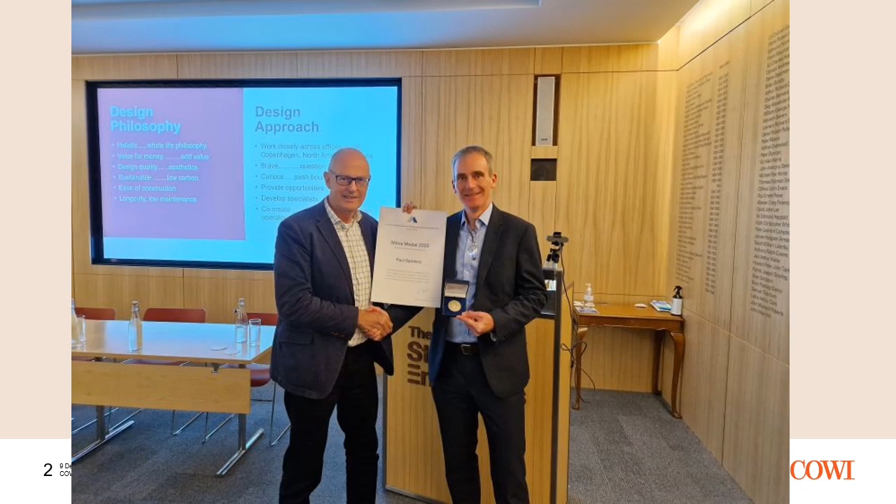I joined what was Flint and Neill, and has now become part of COWI in the UK, a little over 20 years ago. At that time, it was a partnership run by Ian Firth and David Mackenzie. It's now part of a much bigger organisation. But I think the philosophy that Ian and David brought to the organisation and brought through into COWI still remains very firm.

And indeed, preparing for this lecture was a very good opportunity for me to condense my thoughts in this regard. I think we try to bring a holistic, whole life approach to all of our projects. We like to add value, and that's not just monetary value, that's adding value in lots of different regards.

Design quality has always been at the forefront of what we do, and that's a philosophy that's very much been promoted by Ian Firth, and I think is best summarised by his Institution of Structural Engineers presidential address just a few years ago. We work with architects on a great number of our projects, and I think that again is an extremely important way of adding value.

That collaboration is really key to what we do. Sustainability has always been at the heart of what we do. I think the last few years have seen that condensed into a real focus around embodied carbon, but I think that again rings very true to what we do.

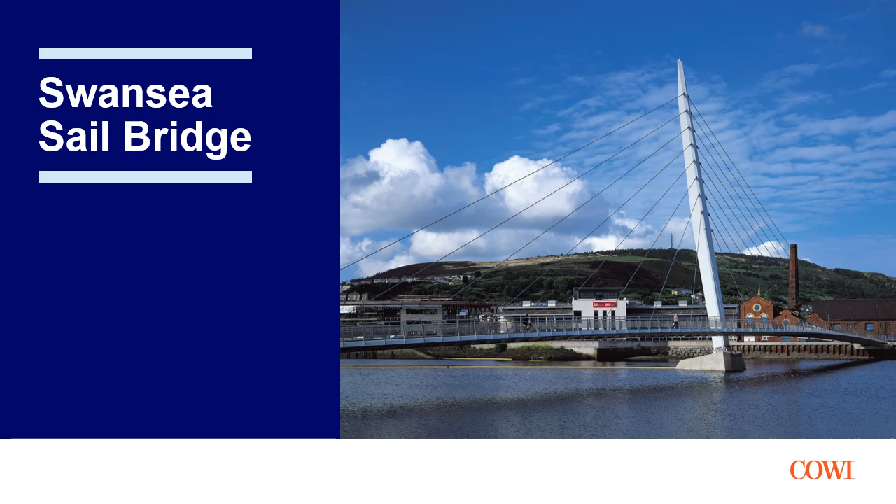So this was my first experience of working closely with architects and really starting to appreciate the value that they bring to projects such as this. I was very fortunate to work with Jim Eyre, who heads up Wilkinson Eyre, together with Martin Knight and Ben Addy, who I've gone on to work with on many other projects through the years.

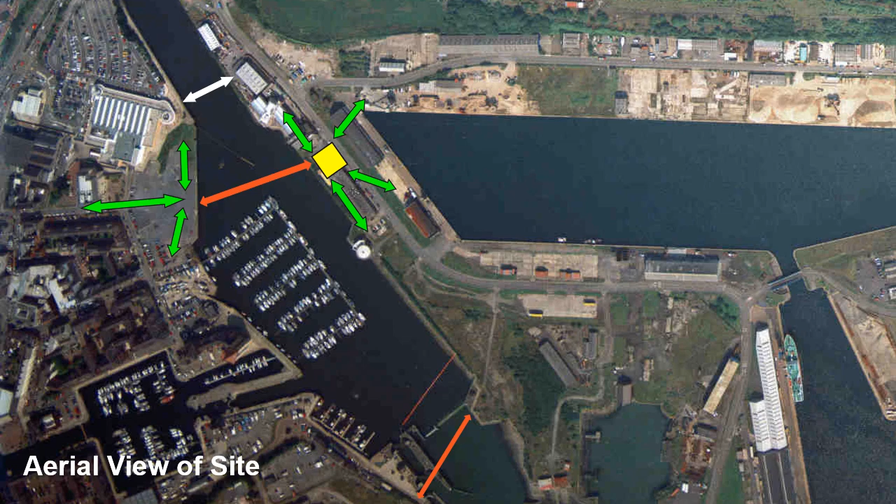This is the design that was developed for the Sail Bridge, very closely developed by Wilkinson Eyre and ourselves. The cable stayed bridge itself consists of a 42-metre high steel mast which is leaning backwards, with a gently curving deck supported off one side by a series of cable stays. Structurally, it's quite a unique configuration, I believe.

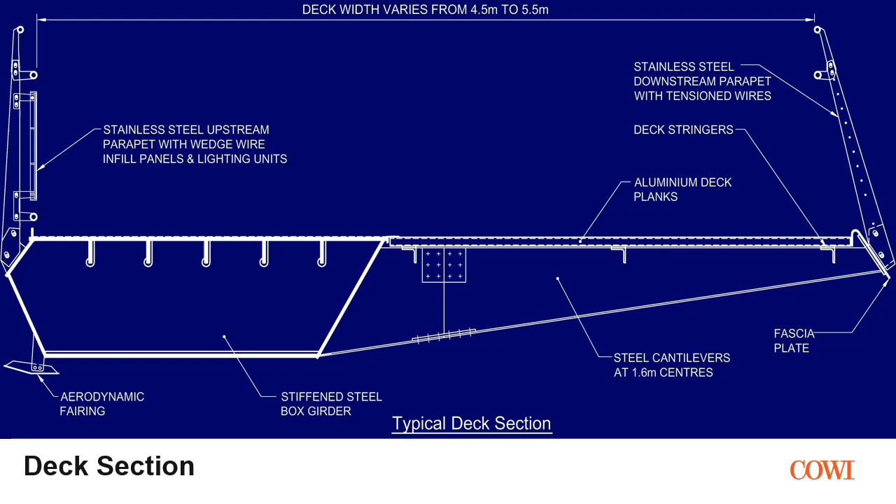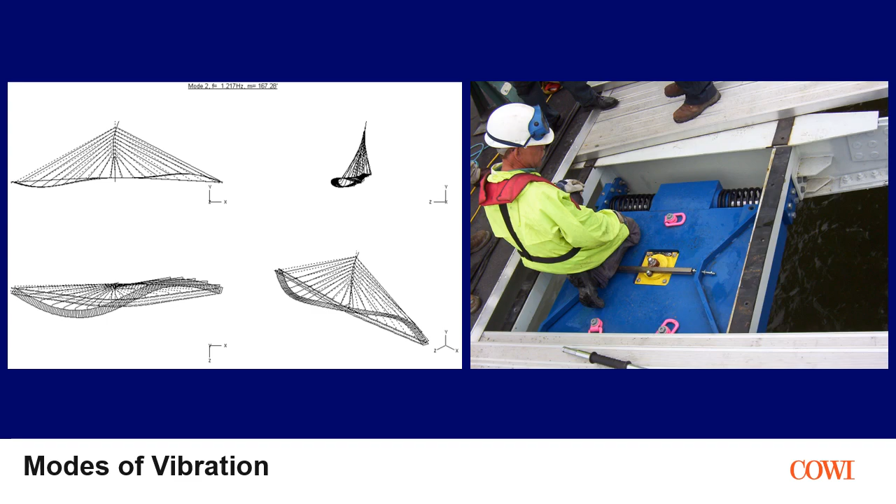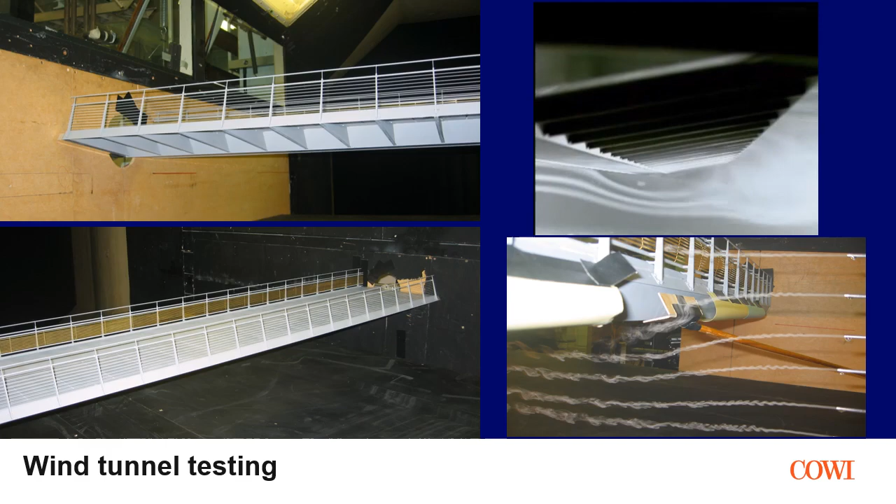This was typical of how Chris went about trying to solve the problem. He investigated changes to the shape of the bridge deck cross section to get rid of the vortex induced vibration, and quickly concluded that adding an aerodynamic fairing on the upstream lower edge, shown in this photograph, provided a very effective means of suppressing the vortex induced vibration. It works by preventing the flow detaching quite so soon.

That effectively suppresses the vortex induced vibrations quite adequately. We were still at a point in the fabrication process where we could detail, in this case, these stainless steel fairings and have them fixed on the upstream edge, and it was quite a neat solution.

This photograph also gives you a good appreciation of the parapets, in this case all stainless steel, all very carefully detailed. And of course that's very important because the user experience is all around the quality of those finishes.

Now to talk about the construction. Again, this goes back to one of the key philosophies I spoke about earlier on, and that's collaboration with the builder. So the mast itself was actually quite a complicated geometry. We engaged in very early discussions with Rowecord, the fabricator, to understand what was and wasn't possible.

Basically, the mast geometry is defined by a series of flat plates. There's no warped plates, but by careful sculpting on behalf of the architects, we were able to come up with this fantastic looking mast geometry.

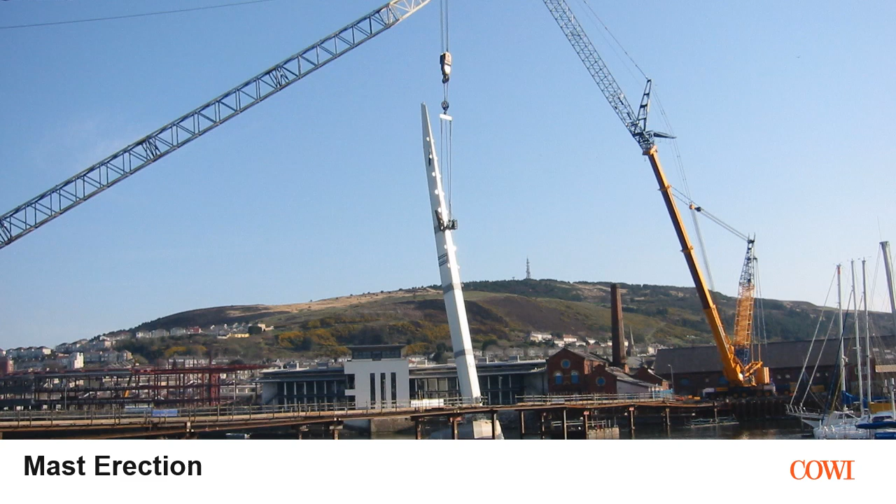This was then to show the erection of the mast. The mast itself weighed around 80 tons, and it was erected using a crane positioned with a lift radius of around 80 meters. At the time, this was one of the largest mobile cranes to be used in the UK.

But it was felt that by erecting the mast as one completed unit, we ensured both better quality of construction and also a faster construction program, and that was one of the key aspirations of our client, the Welsh Development Agency. That approach was developed in conjunction with the contractor Balfour Beatty.

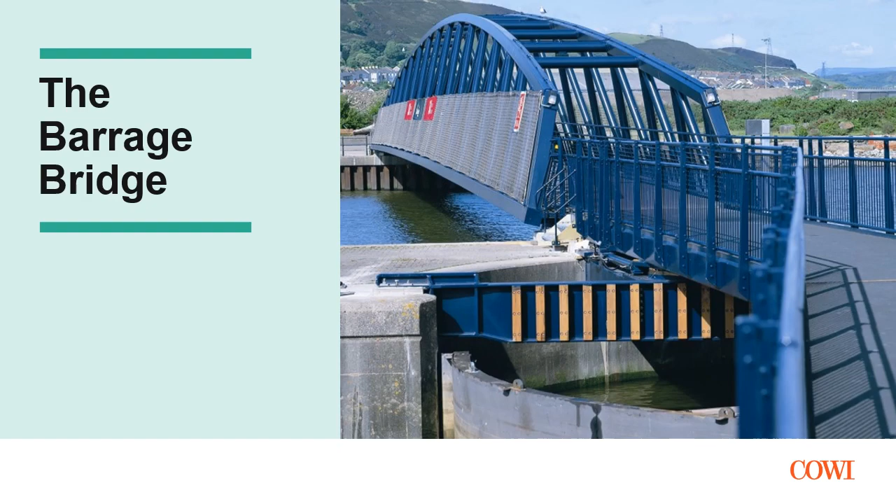Now, I did mention at the beginning that the Sail Bridge was one of a pair of bridges. The other bridge was what we called the Barrage Bridge. That crosses, not surprisingly, over the barrage, somewhat further south. It's not necessarily the most hospitable of locations, but the real eye-opener here for me was that even though this was a secondary bridge, it was still given a significant degree of care and attention in terms of detailing.

In fact, in this photograph you can see the Barrage Bridge and you can see the Sail Bridge in the background. But again, working very closely with the architects, they showed me that by carefully modifying the geometry of the Warren Truss, you could actually come up with something that was reasonably attractive, even if it's a low-cost solution.

I think you probably agree that it's quite an elegant structure, even though it's quite modest. It's around a 70-meter span and it's around 5 meters wide. And the view on the right-hand side gives you a bit of a feel for the user experience by inclining the mast, by inclining the trusses inwards.

You enclose users, you create a safer feel for users, and you increase the structural efficiency by stabilizing the top chord using those simple transverse bracing members.

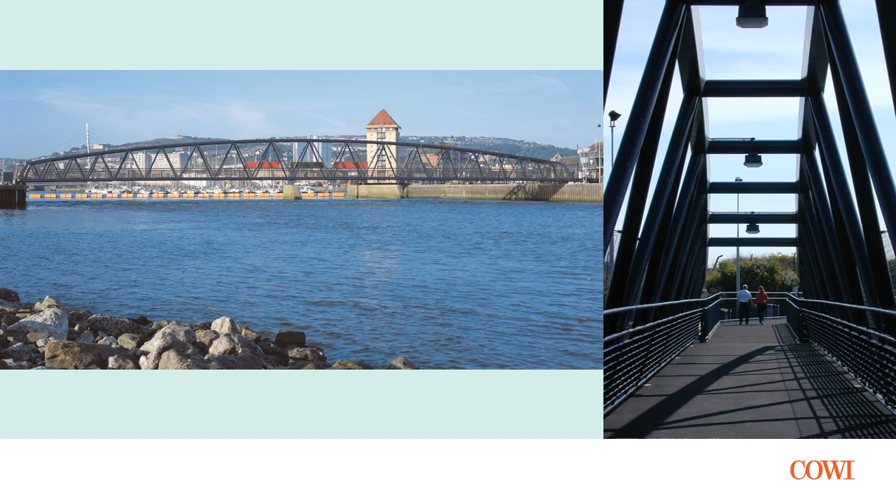The next bridge I'm going to talk about is the Schuman Bridge in Lyon in France. This was a project we won through a design competition with Explorations Architecture, a Paris-based firm we've had a very successful track record with, together with consulting engineers Agibat from France. Our role in this team was to design the superstructure, that's the deck and the arch, as well as leading the design team overall.

This was a hugely challenging project for me personally, because slightly embarrassingly, I don't speak French. I managed to attend numerous meetings over the 18 months or so that the design period lasted, and I managed to understand enough of what was being said, even though I struggled to reply. The bridge itself is located adjacent to a UNESCO World Heritage Site in Lyon, and for that reason, enormous focus was placed on the appearance of the bridge, not surprisingly.

So this is to show the overall geometry of the bridge. You've got main spans of around 85 meters. We decided very early on that we didn't want any cable stays, we didn't want masts. We wanted a very flat structure that was as near invisible as possible given the setting, and yet with a fairly significant span that does introduce a challenge.

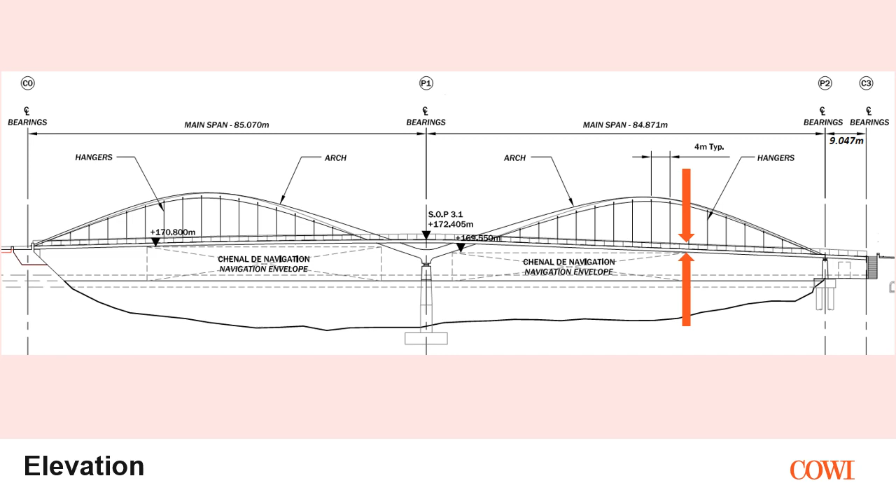So as I say, the solution was this wonderfully slender arch. In cross section here, you can see the very shallow deck, only around 600 millimeters deep, and you can see the arches inclined and leaning outwards. We used the arches to actually separate pedestrians from vehicle traffic, and I think again that adds something quite special to the quality of the design.

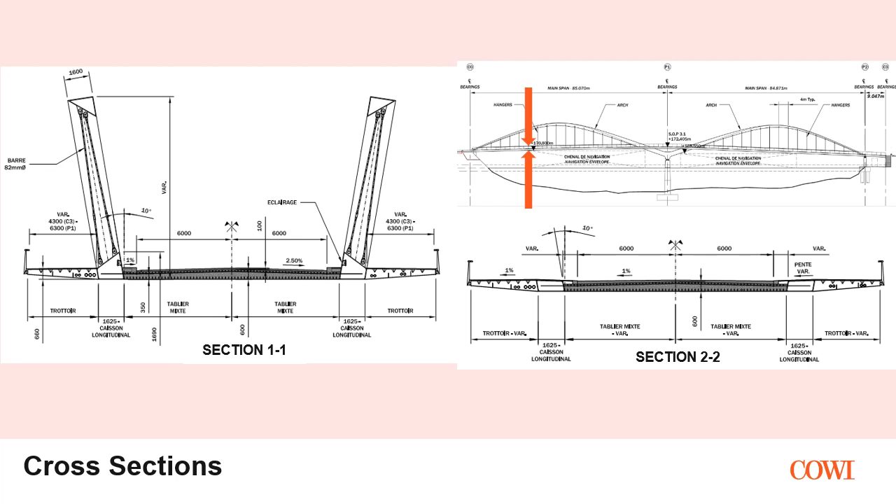Again, this is the perfect example of that very close collaboration with the architects. There was a drive to create these nice wide footways and to create places that people want to stop and rest and enjoy the fantastic views up and down the river.

And that means that the two primary top and bottom plates of the arch are warped, they're twisted, whereas the inside face of the arch is maintained on a constant plane with no twisting there. So key challenges here for us were, first of all, how do we design the arch for such a twist? There are no design rules available for such a variation. And then secondly, could it be fabricated?

So in terms of the fabrication, we went to Victor Buyck, the fabricators, and had some very early discussions within the design period with them about how this could be done. They were very confident it was feasible and gave us some fantastic advice. Then turning internally again to one of our experts, this time Chris Murphy, one of our steelwork experts, we asked him to develop a design philosophy for these twisted plates.

So the fabrication process itself, here you can see a section of the arch being fabricated by Cordioli, the Italian fabricator, who eventually won the contract. I think the wonderful thing here for me is understanding the whole fabrication process, and particularly working with their very skilled craftsmen, I would call them artisans, who were able to introduce the twist that we wanted to the arch.

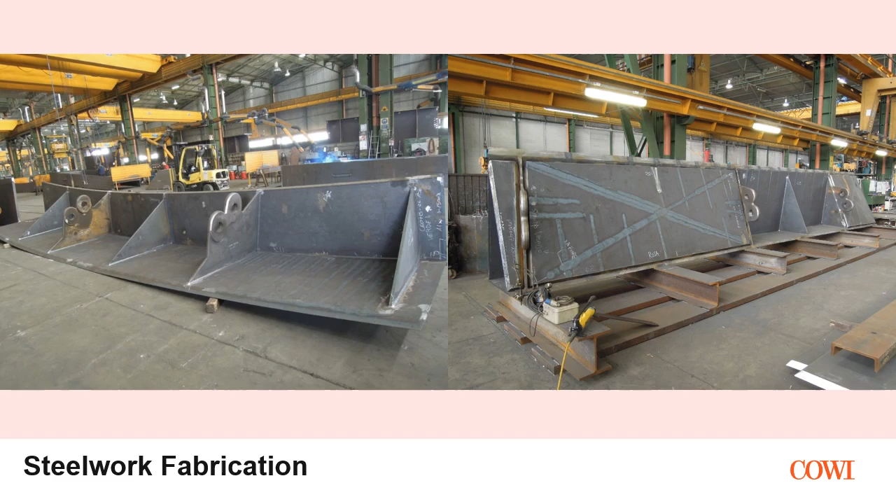Now that twist is actually relatively modest, it's about 1 degree per meter length as you move along the arch. But the twist is introduced, as you can see on the right hand side, by heating the arch or the plate in certain locations. So the process is effectively to force fit the first 2 plates on the left hand side, and then the closing plate you heat and force into position, and the striations you see on that plate are a result of the localized heating to introduce the deformation that's required.

To enable construction of the bridge, we identified a port on the south end of Lyon that was available for pre-assembly of the bridge. This was because there was insufficient space available at the bridge location itself. However, the port was made available.

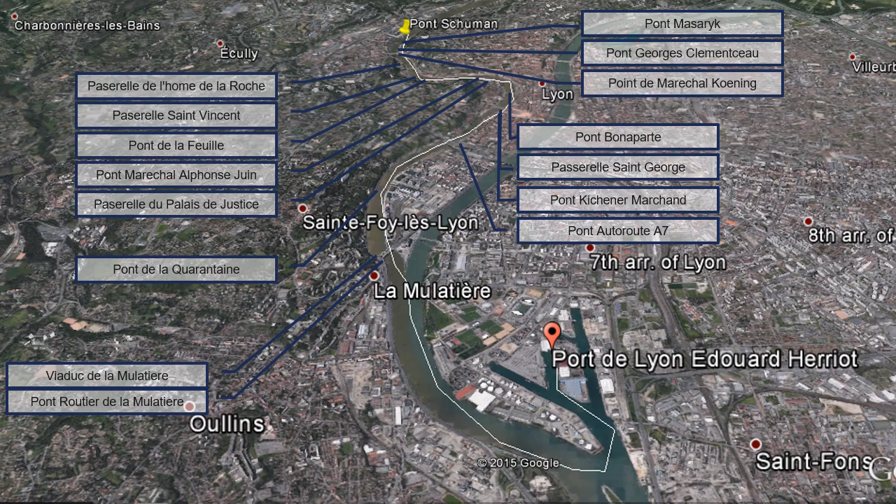The challenge there was that we had to navigate from the port to the final bridge location, where the yellow pin is, navigating under some 15 or so existing bridges.

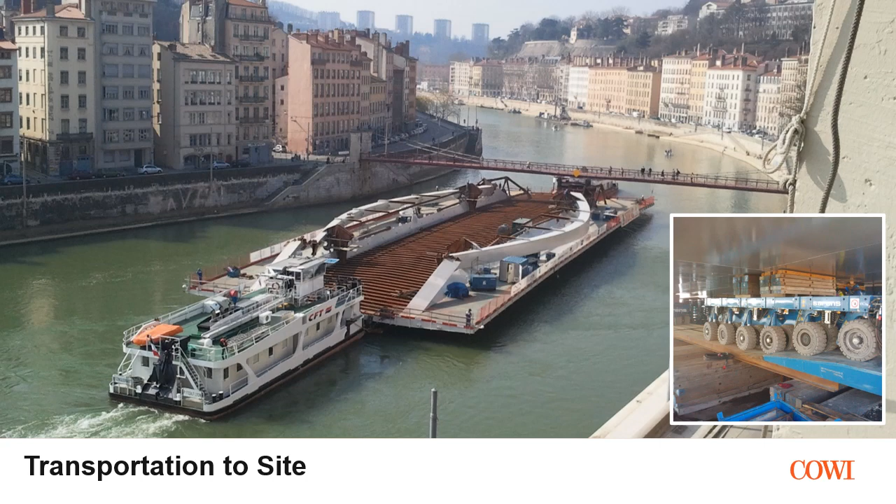Here you can see it being trialled in the dock before the bridge is moved out. Here's a view showing the bridge being moved up the river. And indeed, it passed under one of the bridges with only around 150 millimeters of clearance.

But this was all surveyed in advance, so we were confident it was going to work. Nevertheless, it was somewhat nerve-wracking for Ollie and myself as the two spans were navigated upstream.

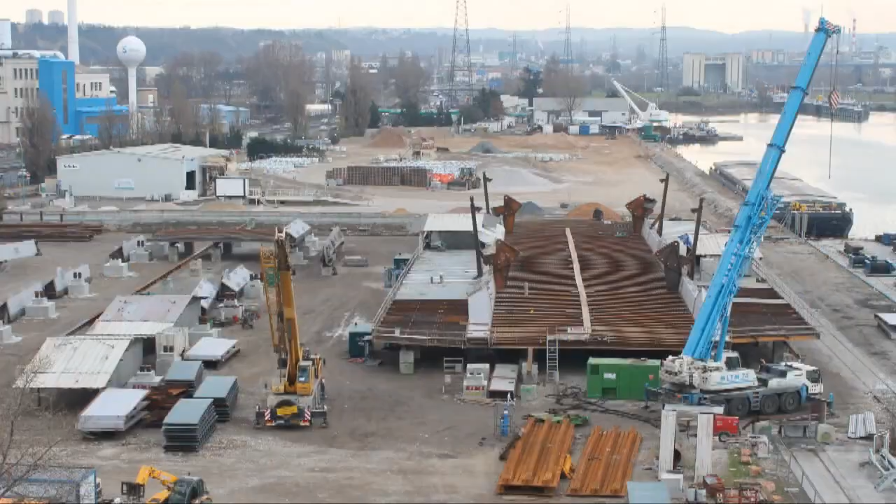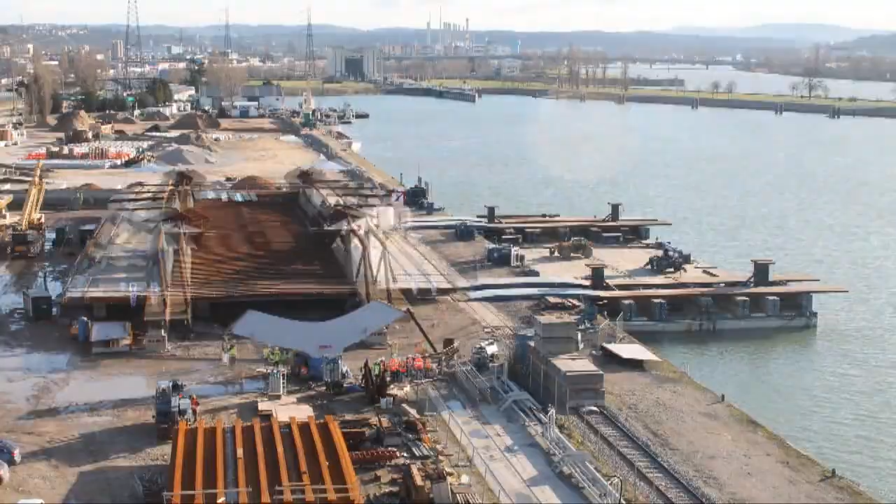I've got a time-lapse video showing construction of the bridge. This starts in the port. You can see the two spans being assembled, and the arches being rotated down into the horizontal position. The bridges were then moved out onto a barge using SPMTs before they were floated upstream to their final locations.

The two spans were moved in different operations around 2 or 3 weeks apart. I do love this video because you start to get a sense of the location itself and the challenge of navigating each of these bridge decks upstream.

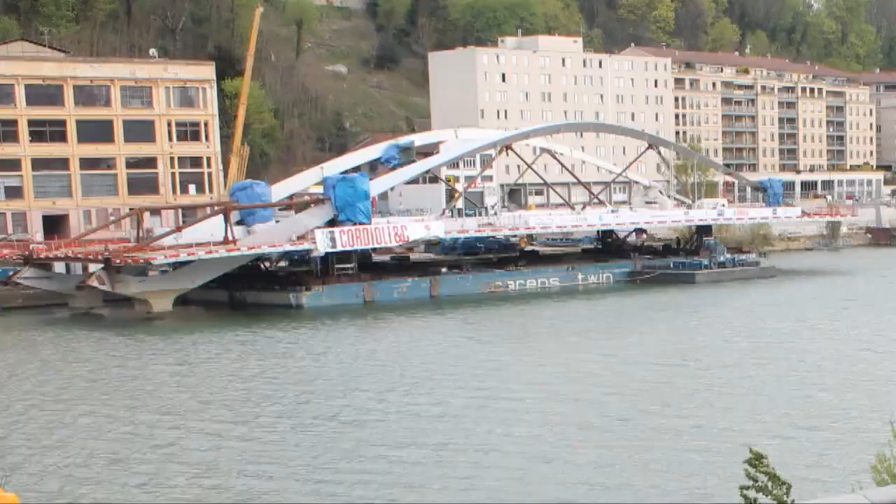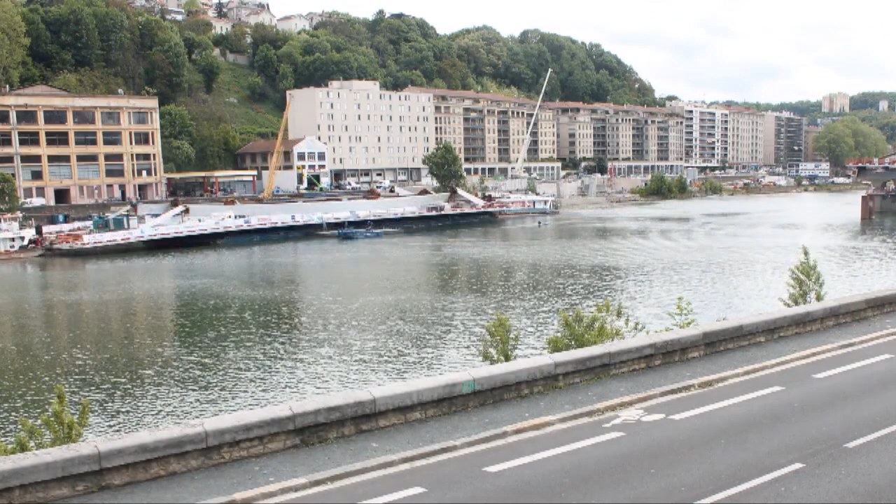So the bridge was actually fabricated and moved, transported without the concrete deck. The concrete deck itself was poured in situ. The deck consists of a series of steel transverse beams with concrete cast around - what we call an infill deck.

This is the second span being erected in exactly the same way. You can see some temporary bracing used to stabilise the arch there. And you've got this wonderful shimmy of a movement as the second span is brought in and gently lowered onto its bearings.

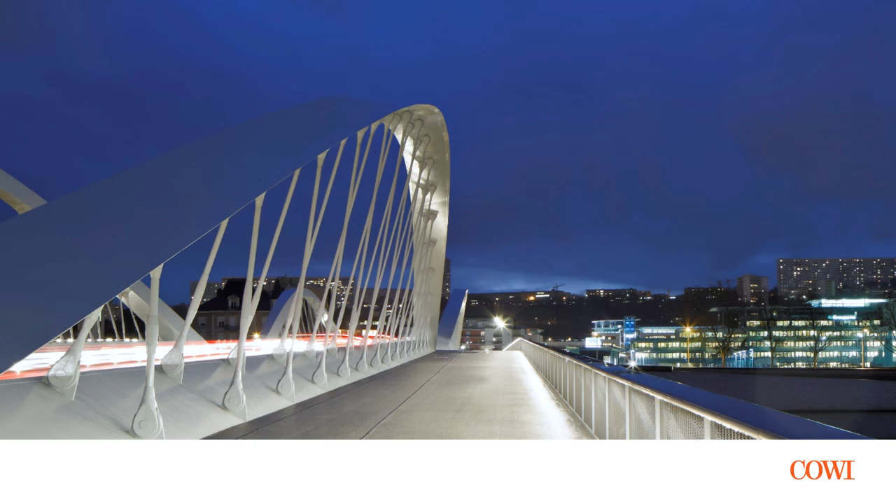Just a couple of views here to show the completed bridge. Again, I love the lighting on these photos, and it does give you a sense of the space available on the bridge deck for pedestrians and bridge users to stop and enjoy the fantastic views both of the bridge and of Lyon itself.

I'm going to use Lyon as the first example to talk about something I mentioned earlier on, and that's embodied carbon. Within COWI we are fortunate enough to have a fairly substantial database of bridges that we've designed.

They're of a variety of different construction forms. Ultimately, most of the bridges are beam and multi-span bridges because that's by far and away the biggest demand. But we do have some arch bridges, some cable stay bridges, some truss bridges and suspension bridges to throw into the mix.

Full credit here to Cameron Archer-Jones and Dan Green for developing this database and for developing a series of tools that we now use readily to assess the carbon content of our designs.

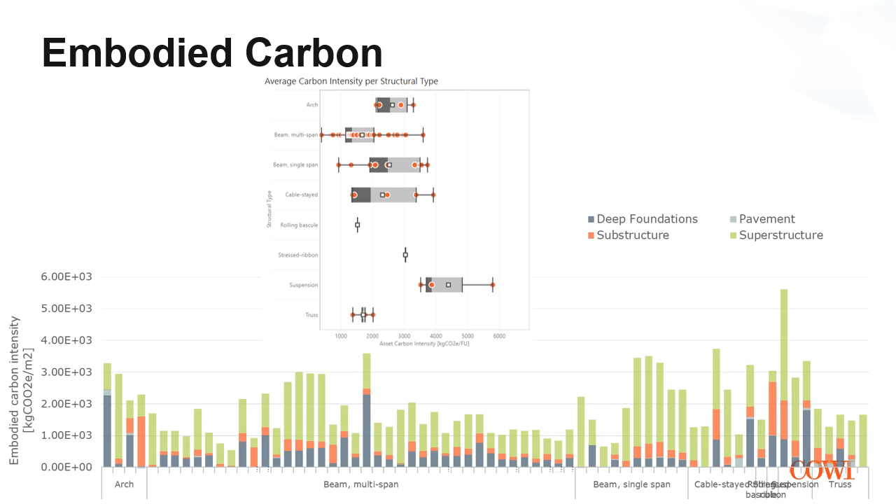So Cameron and Dan have written a paper which revolves around what they call the Scorbs assessment of bridges. This is measuring embodied carbon in bridges and coming up with a bridge rating system. I'd really recommend everybody to read it.

It's fantastic. The idea here is that in the same way that is done for white goods and is done for buildings now, you rate the embodied carbon for the bridge, in this case A to G.

Now it's worth remembering here that for bridges such as arch bridges, as I illustrated on the previous slide, inevitably the embodied carbon for some forms of construction will be higher, and I think that's nicely illustrated by the example of Schuman Bridge here, which doesn't score particularly highly, but is around about an F. But I think it's best to tell it like it is - this is an honest view of where we're at.

The next bridge I'm going to talk about is the Mersey Gateway Bridge in the UK. This has been by far and away the biggest project I've worked on. At one stage within COWI, we had around 100 engineers working full time on it.

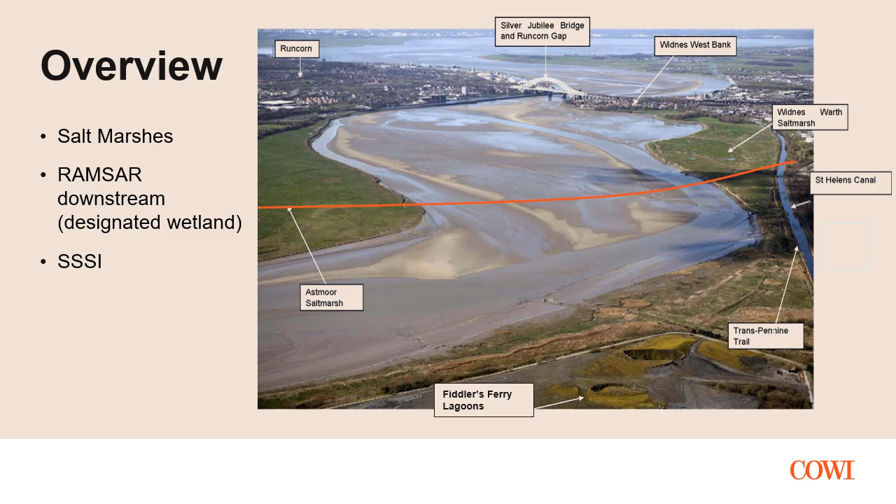Key constraints here revolve around the salt marshes, the Ramsar site downstream - that's a designated wetland - and an SSSI. I've included this example for several reasons, but when we talk about more for less, the key thing here is working within the environmental constraints.

The constraints in fact were fairly wide-ranging. There was quite an industrial legacy associated with the area, which resulted in significant contamination on the bridge site. I won't have a chance to talk much about that today, but that certainly drove a number of key features of our design, where we worked closely with the contractor and with the likes of the Environment Agency.

The environmental constraints determined that we could only locate foundations in what were termed some grey zones within the river itself. I'll come on to that in a moment. That effectively drove the design towards being a cable stay bridge solution.

We crossed the Manchester Ship Canal and the St Helens Canal. Aesthetics were a key feature of this project, and I think there's a wonderful example here because the client, Halton Borough Council, were sufficiently well informed to engage architects to advise them on bridge aesthetics, and that had a significant bearing on the solutions that were eventually developed.

Wind shielding was required in order to prevent the bridge being closed in high winds, a problem that's been encountered by the Silver Jubilee Bridge. So this was all about providing robustness around the transport corridors.

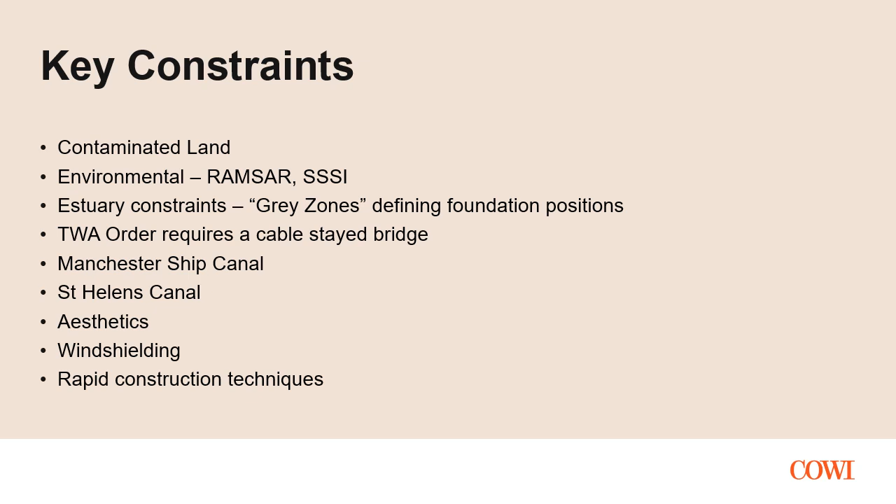Being a concession contract, rapid construction techniques were critical, because the bridge doesn't start collecting revenue until it's open. So clearly getting it open to traffic as quickly as possible is paramount.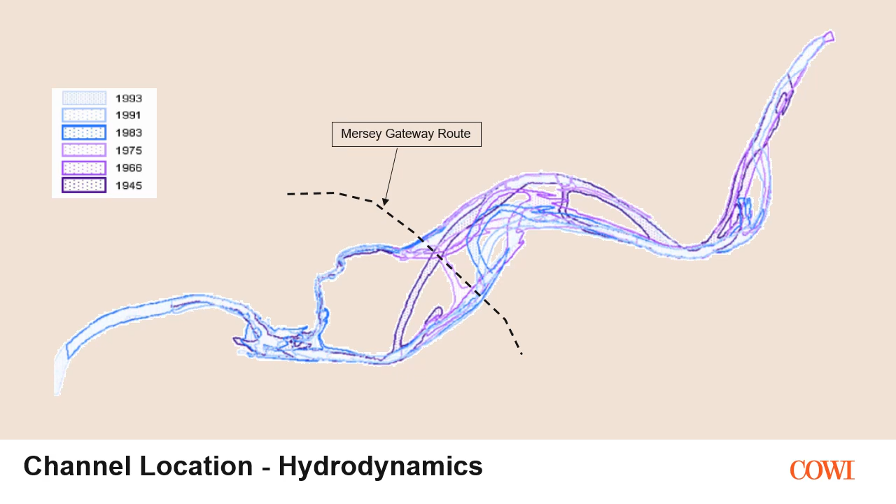One of the key requirements of the design solution we provided was to avoid inhibiting in any way the migration of those river channels.

As part of the optioneering in the tender stage, we developed a series of solutions for the main crossing - that's the cable stay bridge crossing, which is shown here.

The final preference was actually to go with a large single cell box and to have mono towers, that's single columns for the towers. That was primarily because mono towers enable a much more rapid construction process for the towers themselves compared to building inclined tower legs or even two tower legs.

However, the fact you've got a mono tower really dictates that you need a torsionally stiff box for the deck itself, which is why that particular solution was proposed.

The choice was made to cast the bridge deck in situ using the balanced cantilever technique, and I'll explain a bit about the construction process in a moment.

A similar exercise was undertaken for the approach viaducts, which are about 1.2 kilometres long in total. We looked at a number of different solutions, with a big focus on making sure we had continuity of bridge deck edge details, and that eventually led us towards a single cell box, as you see here in this view.

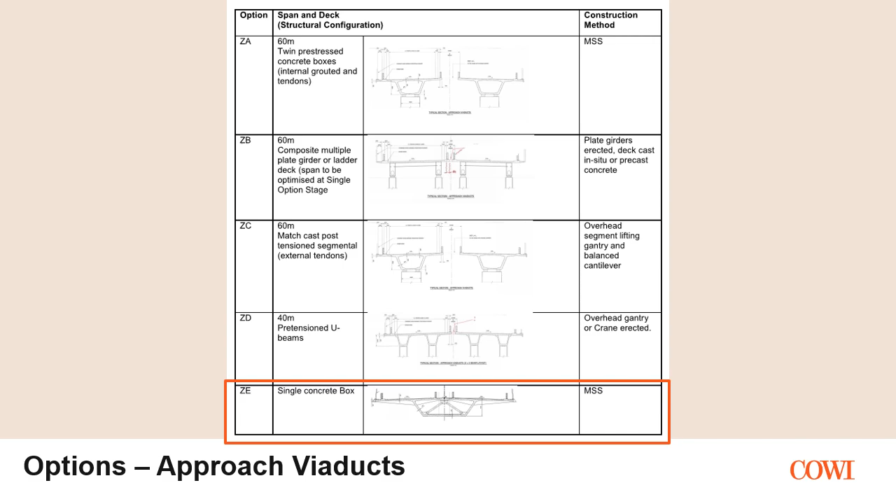There was a decision - so in terms of the option selection criteria for Mersey Gateway, programme was of course key. The faster you can build the bridge, the more toll revenue you can collect, because the concession period starts from the moment you sign the contract, i.e. before construction starts.

Maintenance is key, and the real thing to emphasize here is that the bridge operator is able to inform the inspection and maintenance regime they want right from the beginning of the design process.

And I think that goes back to a point I touched on at the beginning about the importance of longevity and reducing maintenance costs. Capital cost is of course always important.

Aesthetics I've touched on already as being a key aspiration from the client side, and we engaged Dissing and Weitling to be our architects. We've worked very successfully with them on a number of projects all over the world, and they worked integrated within our design team to develop the solutions.

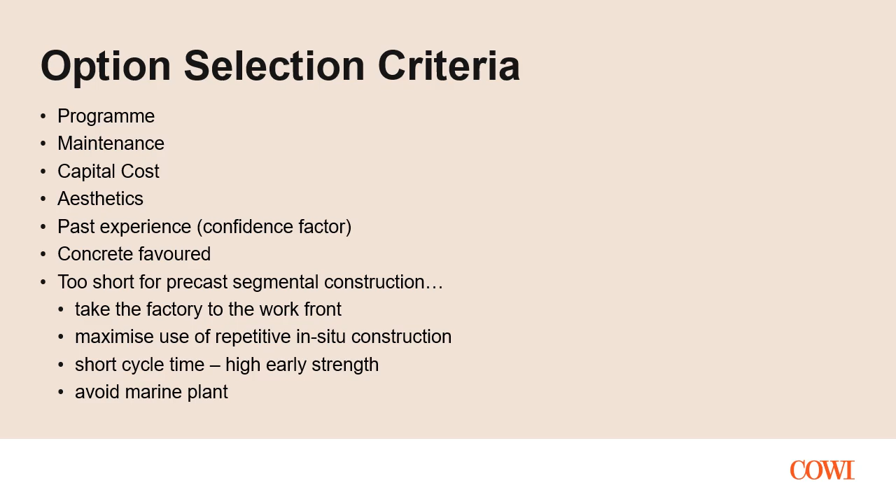Past experience from the contractor's side was a big factor in determining their preferred solution, and in particular they favoured in situ concrete construction. That was partly to reduce maintenance costs associated with repainting of steelwork within the concession period, but the choice for in situ really came because the size of the scheme means it's not economic for precast segmental construction. So the philosophy here is to take the factory to the work front and maximise the use of repetitive in situ construction cycle times, which requires early gain of concrete strength, and avoiding the use of marine plant.

So here you can see an elevation on the main crossing. That's the cable stay bridge. It's about 1 kilometre long. You've got 3 towers. You'll notice the central tower is significantly shorter than the outer towers, and that was primarily driven by the fact that we weren't permitted to put anchor piers in the back spans here and here, which is what you normally try to do with a cable stay bridge.

We were restricted to having the pylons in what we call the grey zones, shown here, here and here. I referred to those earlier on. And we've got a modified harp arrangement in terms of the stays themselves.

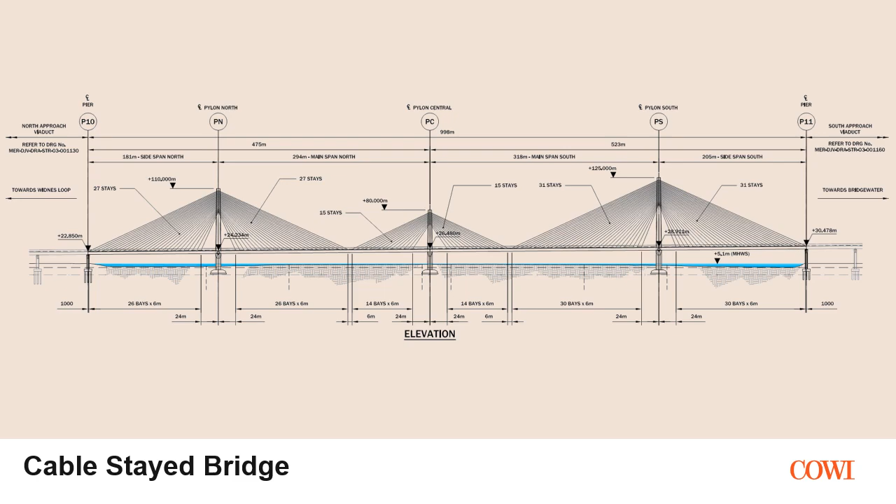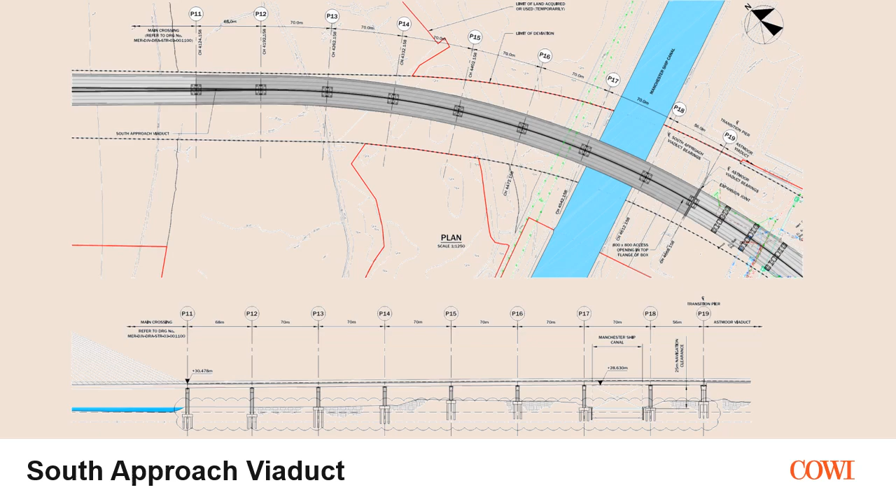And similarly on the south viaduct, we managed to make some simplifications there. You can see here where we cross the Manchester Ship Canal, and we lead on to what's called Astmoor and Bridgewater Viaduct on the south end to the right hand side here. Again, spans of the order of 70 metres.

The bridge deck cross section itself, we've got enough space for 3 lanes in each direction. You've got the space down the middle for the pylon, at least in the cable stay bridge section. You've got steel delta frames here inside the cable stay bridge section of the box, and generally speaking you've got ribs at around about 6 metre centres supporting the concrete deck slab.

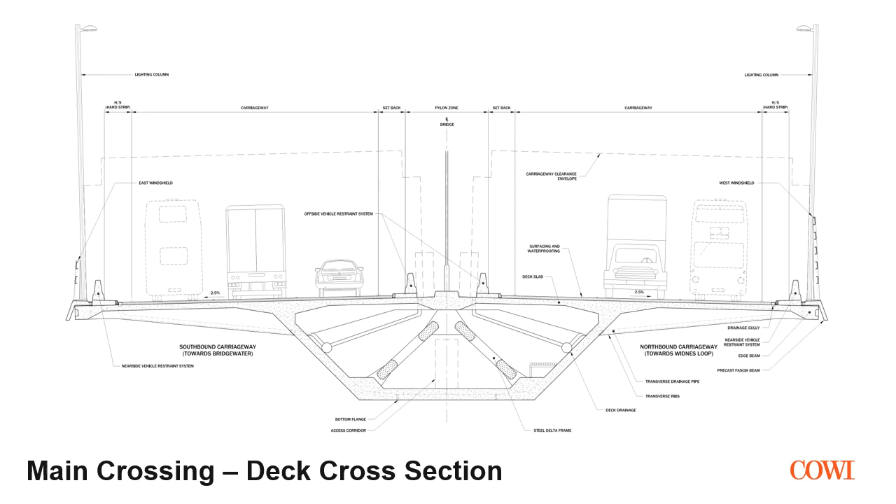In fact, one of the real features in terms of pushing the design is the fact that the 250mm thick deck slab is spanning some 6 metres between these ribs, but spanning 7 or 8 metres transversely as well. So we're working the deck slab quite hard.

In terms of a breakdown of what the bridge deck cross section looks like, every part of it is designed to be optimized really around not only structural performance and minimizing quantities, but also buildability. And this cutaway, I think, illustrates a few points worth touching on.

So you've got these fabricated steel delta frames you can see here. On the ends of those you've got precast anchor blocks, which are deviators and anchor blocks for the post tensioning. They have quite dense reinforcement in, so there was a significant advantage associated with prefabricating those and lifting them in already cast. Given their complexity, you've got transverse post tensioning running through the deck slab.

That's to minimize the thickness of the deck slab and to make it span, as I described in the previous slide, over these fairly large bays. On the edges we have precast anchor blocks, primarily to allow us to stress the transverse post tensioning as early as possible in the construction cycle, when the concrete is still quite young and still gaining strength. The advantage these give us is that they distribute the forces from the anchor block over a much larger area.

Here you've got precast fascia beams along with all the rest of the deck finishes.

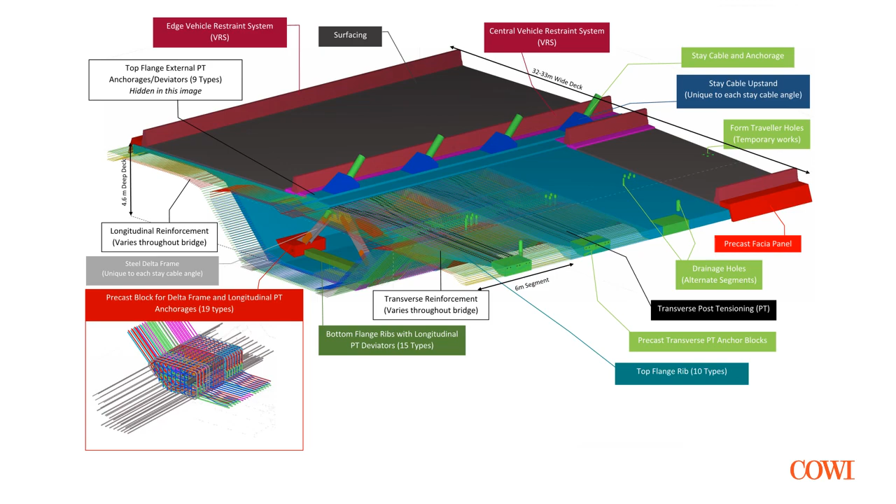The pylons are fairly conventional. You've got a fabricated steel box on the inside with in situ concrete cast around. The tallest of the pylons rises around about 100 metres above deck level, and it's only 3.5 metres wide in this elevation. So the pylons are actually remarkably slender.

The articulation of the bridge is quite unique in that the approach viaducts and the cable stay bridge are continuous, with expansion joints only at these two locations. The real advantage is the simplification of the articulation and elimination of expansion joints and the problems that go with them, which harks back to the importance of maintainability within our designs.

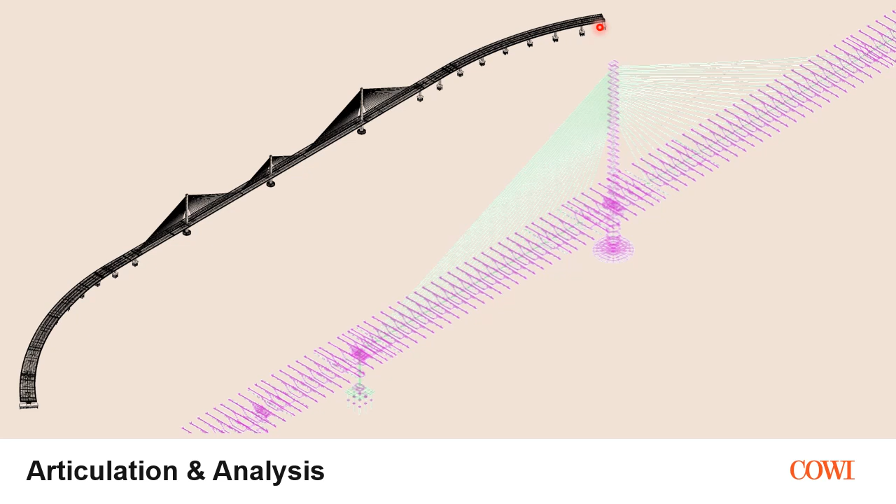That did create a challenge in terms of how we analysed the bridge, because it meant we had to have one model for the entire bridge, and this shows our global model here.

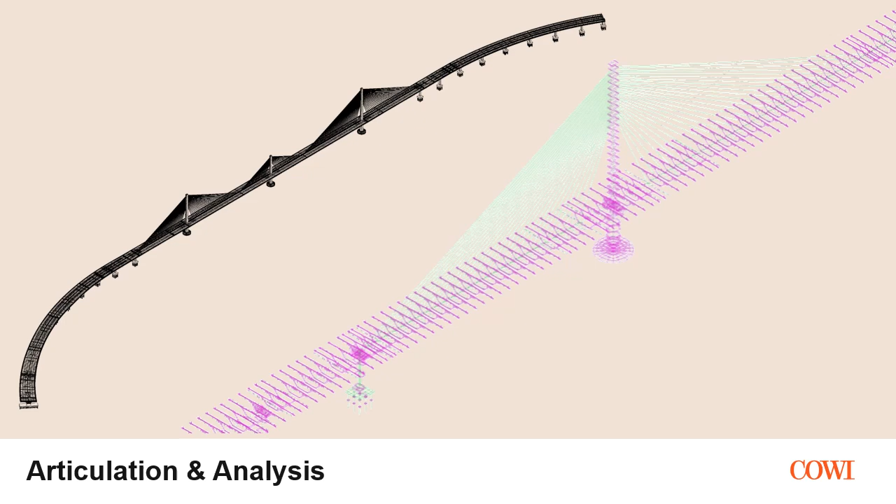The articulation is such that all of the longitudinal forces are taken on the centre pylon, resulting in some fairly substantial bending moments at that pylon. However, that pylon actually has the lowest overall vertical reaction, which created some challenges in the design itself.

We had to undertake aerodynamic testing of the bridge deck cross section to prove both the aerodynamic stability of the bridge deck and the performance of the wind shields themselves. You can see the wind shields in the left-hand photograph.

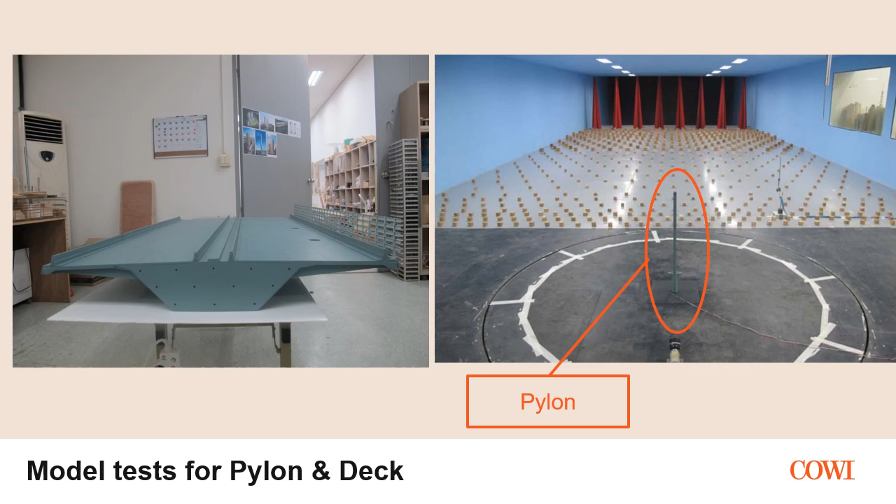We also undertook testing of the pylon itself. You can see the pylon in a wind tunnel here, where wooden blocks are being used to recreate the right levels of turbulence in the wind flow.

We used our specialists not only to supervise and advise on the wind tunnel testing—in this case done by John Rees, one of our internal wind experts—but we also had the ability to undertake CFD analysis of the bridge deck cross section in advance of the wind tunnel testing, which was particularly useful in advising the performance of the windshields themselves.

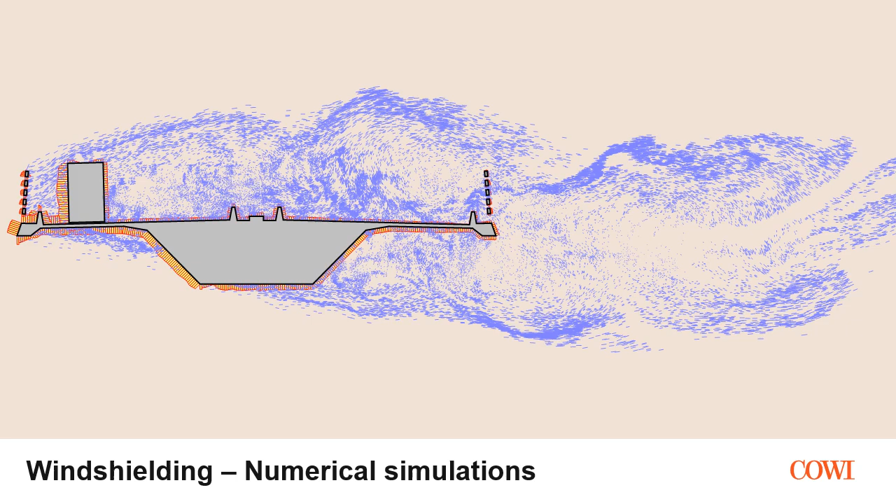Here you can see the actual bridge deck cross section being tested along with our simulated high-sided vehicle, where this model is being used to measure the overturning moments on the vehicle.

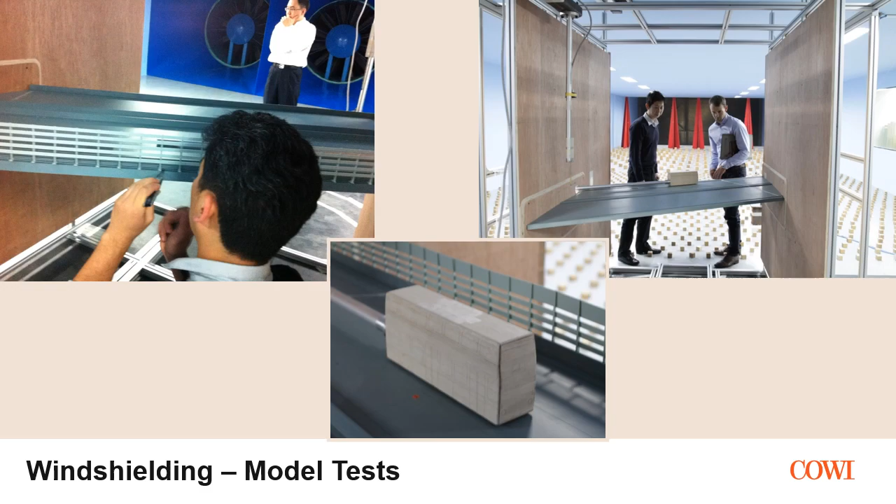I haven't talked about the other structures on the project, but one point I wanted to get over was the importance of developing a family of structures. We did this by working closely with Dissing and Weitling, so there was a common resemblance throughout the project. You can see the main crossing in the centre image and the two images with the pylon on the left, and on the right-hand side the family of structures we developed for use elsewhere on the project, which I think was a key positive for us.

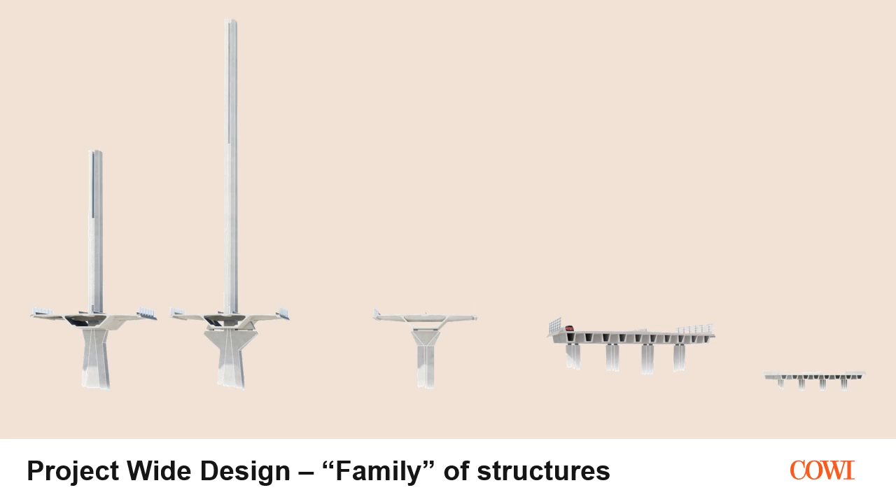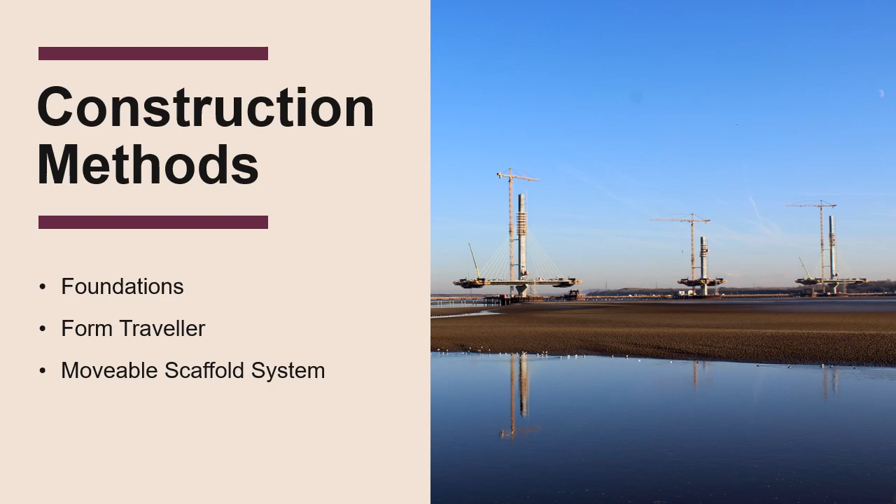In terms of construction methods, I'm going to talk about some of the foundations, the form traveller used for the cable stay bridge, and finally the movable scaffold system used for the approach viaducts.

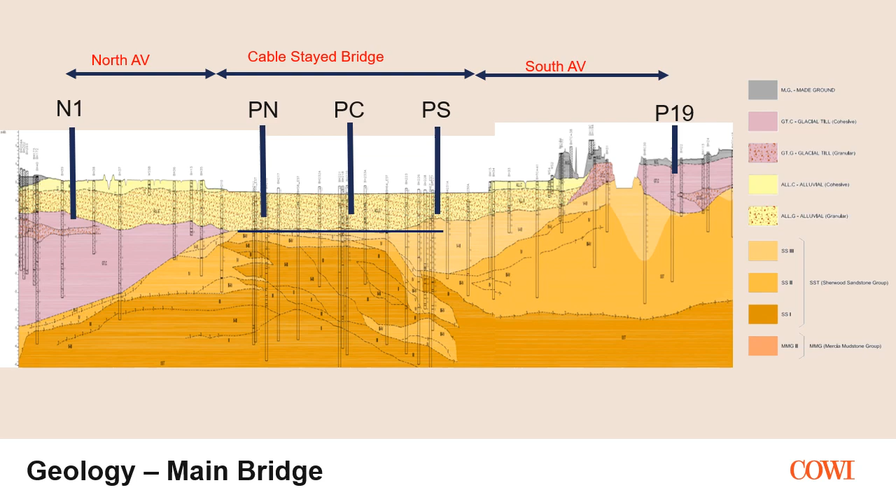On the north and south approach viaducts, we did in fact have conventional pile foundations, but they were developed by Hugo and his team to be incredibly efficient.

Here you can see one of the pylon foundations under construction. Hugo had to work very hard to convince not only our own contractor but also all of the other key stakeholders, including the end client, that these pylon foundations were feasible, offering massive advantages in reducing construction cost, risk, and particularly programme, effectively by their simplicity.

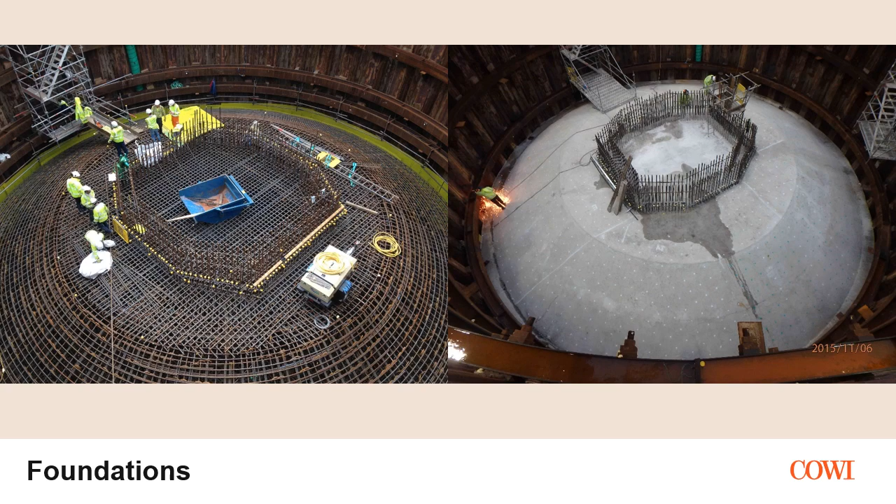Here you can see the foundations in a more advanced stage of construction, and finally the casting of the first of the foundations.

This shows the cable stay bridge cantilever construction underway, and in fact you can see the movable scaffold system gantry being used to construct both of the approach viaducts on the north and south end.

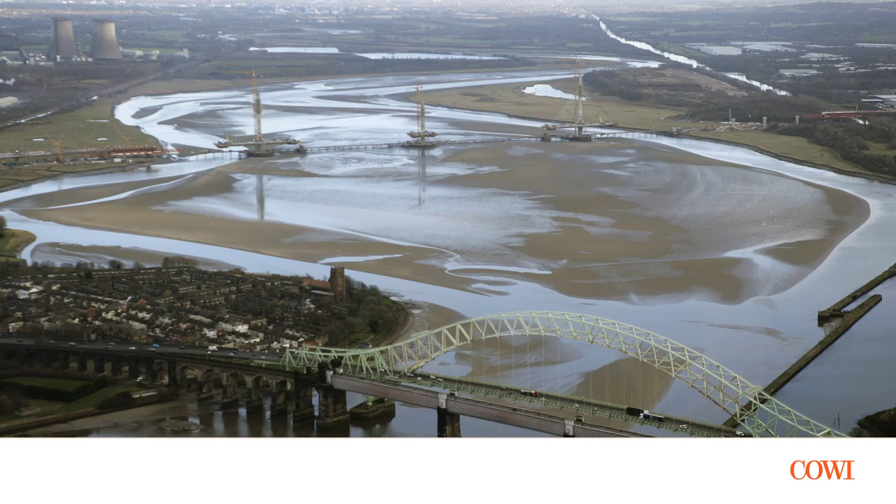The cable stay bridge itself was constructed using a fairly conventional system of balanced cantilever construction, casting 6 metre long segments one after the other in a balanced fashion, after the pylons have just been erected using a jump form system.

We did in fact need two temporary towers here and here in order to stabilise the longer of the spans during cantilevering.

This shows integration of some of the temporary works within the construction of the bridge. Here you can see the temporary pre-stressing, which is used to clamp down the bridge deck onto the pylon head during cantilevering, at both the north and south hammerheads.

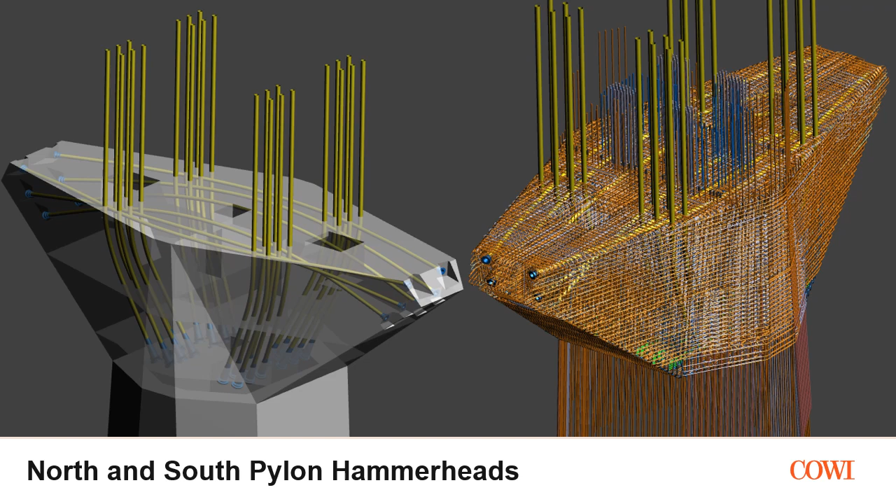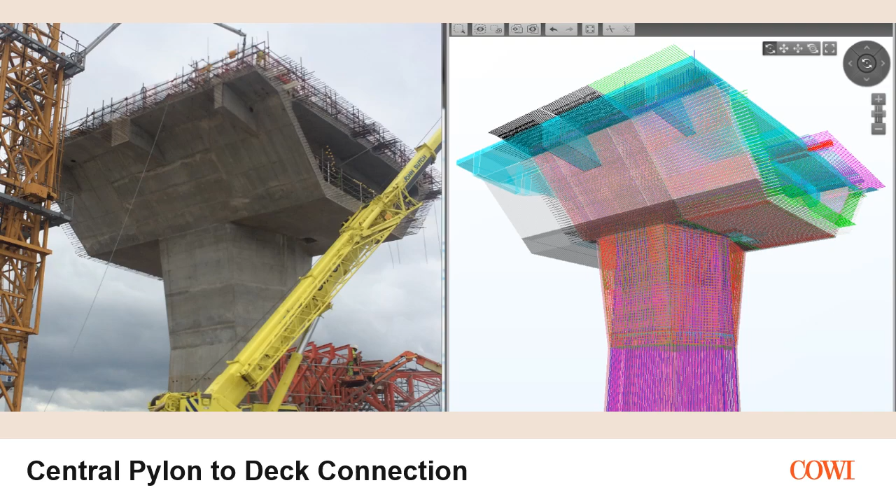Here you can see the central pylon under construction, and on the right-hand side our Tekla model showing the reinforcement detailing. Back when we were developing these technical models in 2015 or so, we were still at a relatively early stage, both as a profession and as an organisation, in terms of what we were doing with these 3D models.

But this was fantastically useful because it allowed us to check for clashes before construction progressed. Here you can see the form traveller for the pylon being assembled on top of the cofferdam on the left-hand side. The four arms projecting from the pylon are then used to lift the form traveller up into position, shown in the centre photograph. On the right-hand side you can see the pylon at a fairly advanced stage of construction.

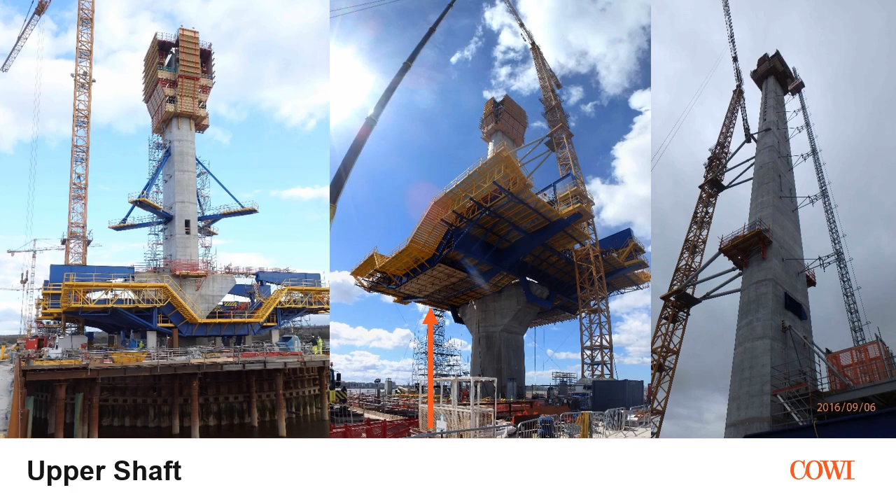The pylon was constructed in 5-metre lifts, and wherever possible we prefabricated the reinforcement cages to reduce the cycle time. Here you can see one of the cages assembled and being transported out before being lifted in. We actually managed to achieve a cycle time of around 5 days for each pylon segment, which was pretty impressive.

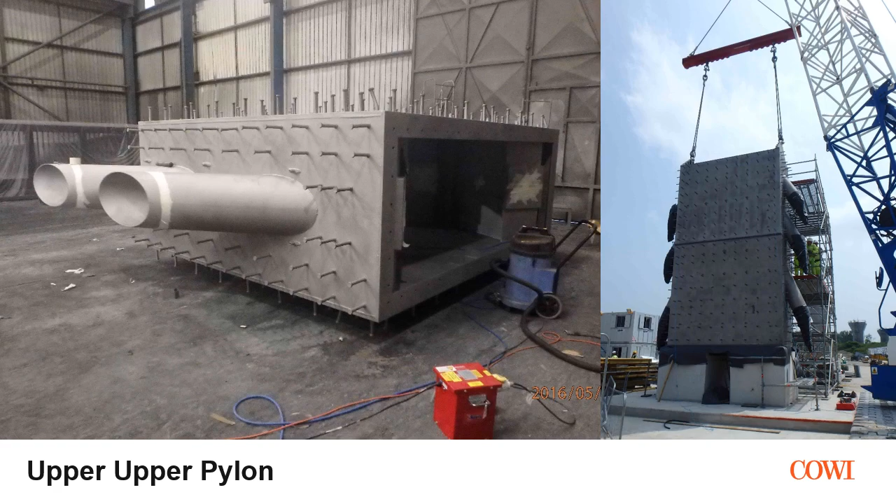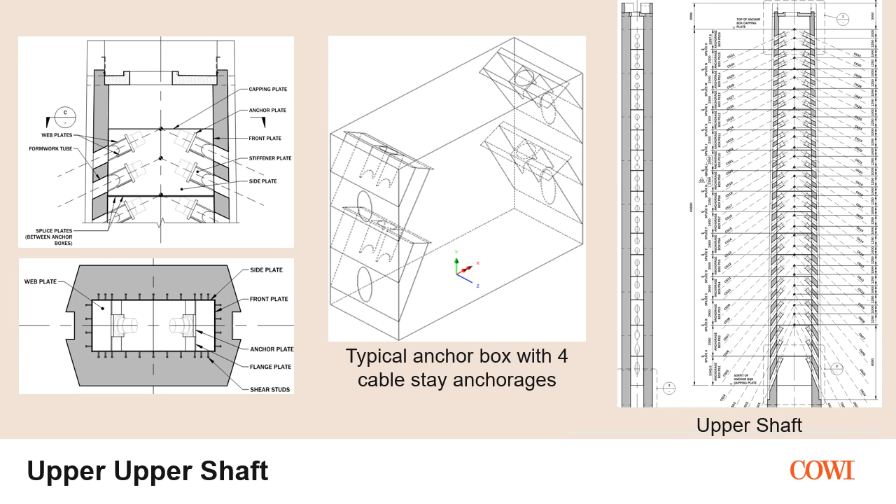This shows fabrication and assembly of the internal fabricated steel box used for the cable anchorages. The cable anchorages are relatively conventional, and the key feature is that by prefabricating the steel boxes off-site, it gives us the chance to check the geometry of the stay anchorages in advance of them being lifted up.

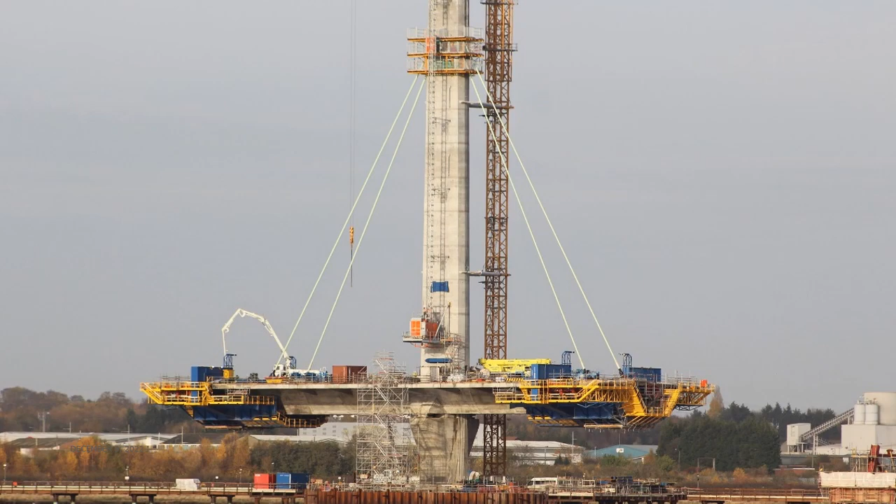Just to talk a little about the deck construction, here you can see the form traveller cantilever construction just starting out, then at a slightly more advanced stage. Again, all of this was very carefully coordinated in conjunction with the contractor.

Construction here is at a much more advanced stage. I should say that the contractor consisted of Kier, FCC from Spain, and Samsung, who are probably better known for providing mobile phones and tablets, but a pretty powerful construction joint venture, and that's what you needed for a scheme of this size. Here you can see construction at a more advanced stage, and the access jetty, the temporary access jetty that ran all the way across the estuary, which was a key feature in providing access for construction.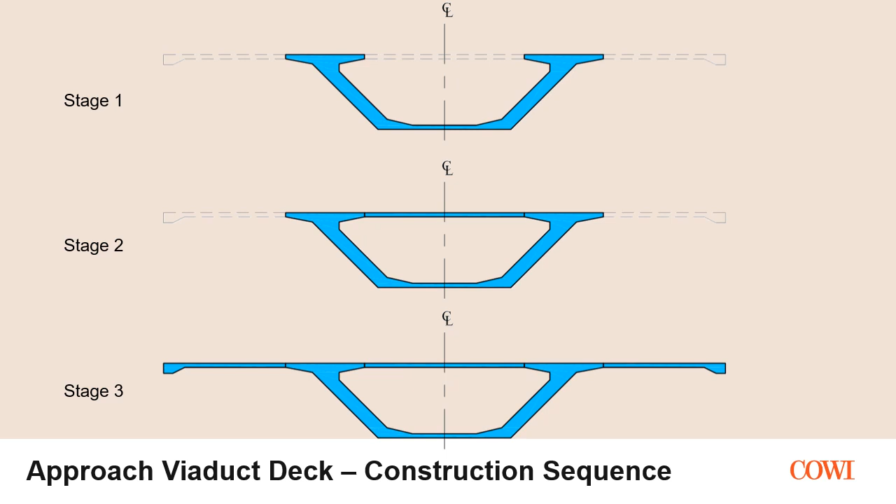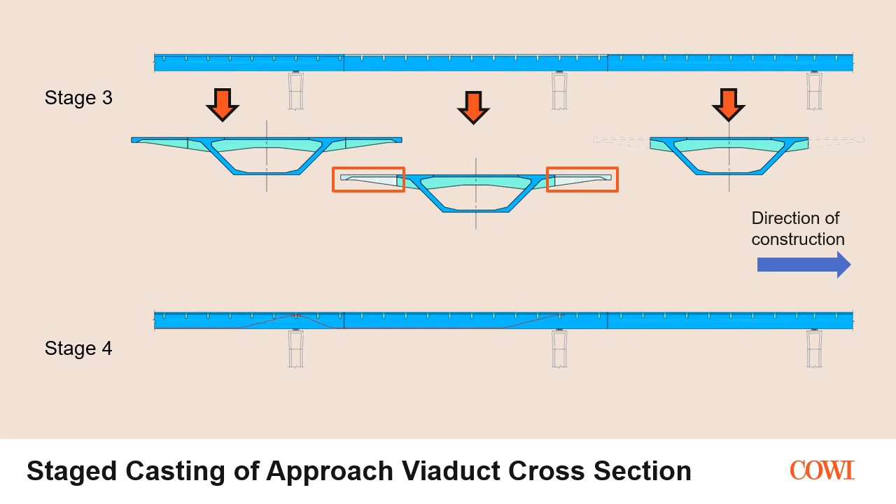So here you can see the first stage being cast on the MSS, the infill slab cast using a conventional falsework system propped off the bottom slab, and finally the cantilever wings cast using a completely separate form traveller system. This shows the reinforcement cages and pre-stressing having been assembled, all prefabricated off-site, typically in 6-metre long bays, before being lifted up and positioned within the MSS.

And I like this view particularly because it shows all 3 stages of construction for the approach viaducts: stage 1 on the MSS, stage 2 where the infill slab is being cast, and stage 3 where the cantilever wings are being cast.

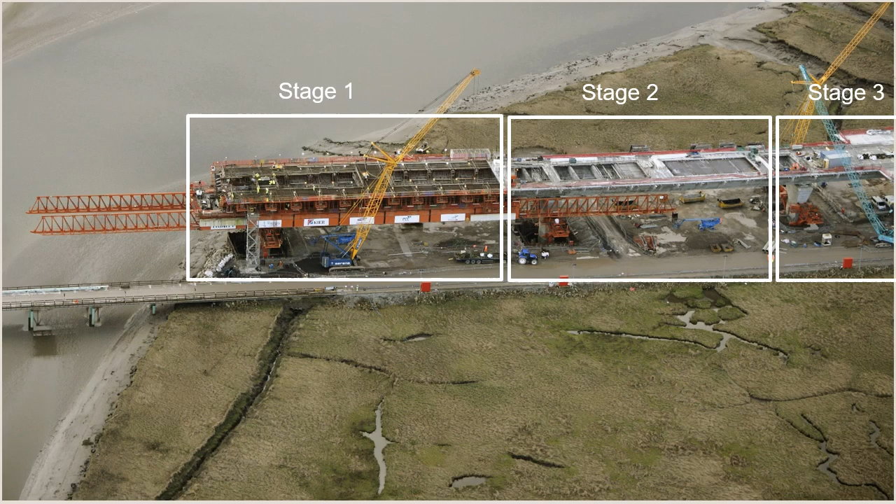And then in terms of embodied carbon, we're actually really pleased with Mersey Gateway. It scores a B on the SCORS rating, which is very impressive when you think of the span of the bridge. Normally, as spans get longer, you'd expect a slightly lower rating, slightly higher embodied carbon, but actually I think this nicely illustrates the efficiency of this design.

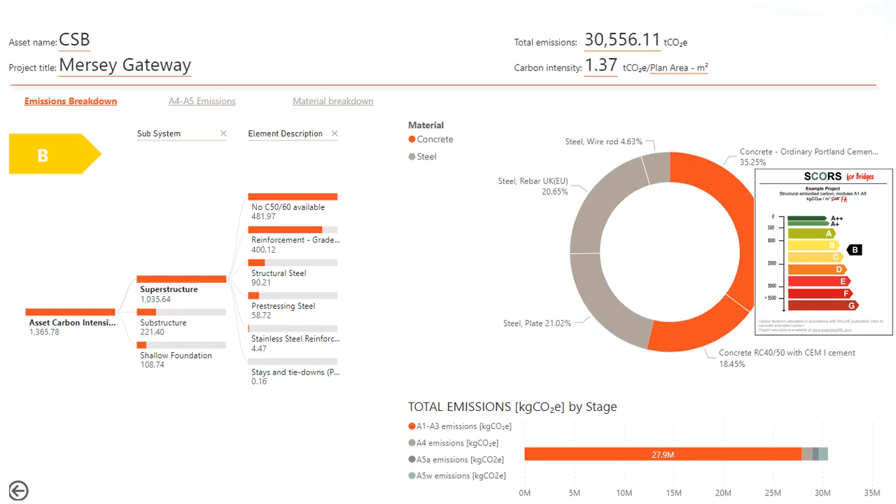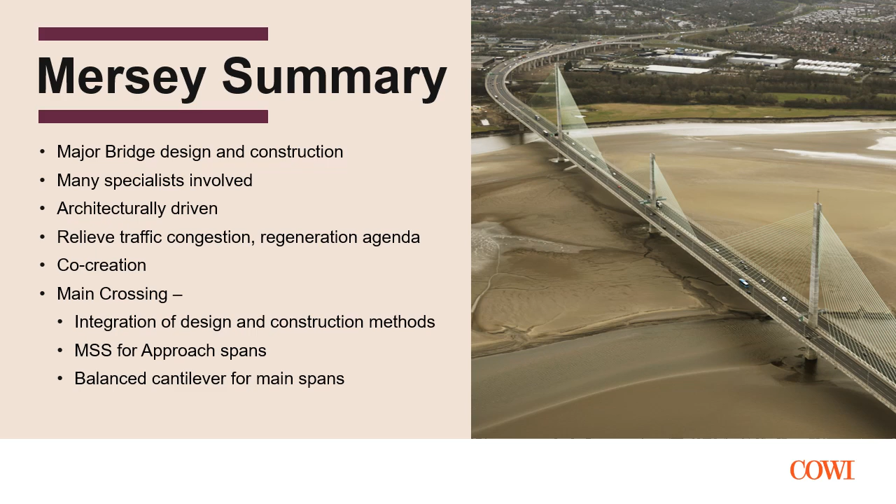In summary, this is a brilliant example of major bridge design and the integration of construction methodologies. There were many specialists involved. Architectural design was key to the solution, adding enormous value in terms of relieving traffic congestion and promoting regeneration in the area. In terms of co-creation, it's a great example of how we as a unit work closely with our clients, the wider design team, and the contractor.

My penultimate project is really quite different. This is a project in Bangladesh to design foundations for a 400 kilovolt crossing. We first became involved in this Padma project back in 2007 when Ian Firth and I travelled out to Bangladesh to write the terms of reference for the design of the Padma Bridge.

We subsequently became the independent design checker for the bridge, and then in 2018 we were invited to prepare the design for this 400 kilovolt line crossing, just downstream of the Padma Bridge. Here you start to get a flavour of the scale of the project - the Padma Bridge itself is 6.3 kilometres long.

The real challenge around Padma Bridge is actually around construction of the foundations. You're sitting on extremely poor quality soils with no rock to speak of at any depth. The river itself develops deep scour channels down to minus 47 metres on a 1 in 100 year return period basis. Any foundations in the river are particularly vulnerable to ship impact and seismic effects, given the foundations cantilever from the riverbed.

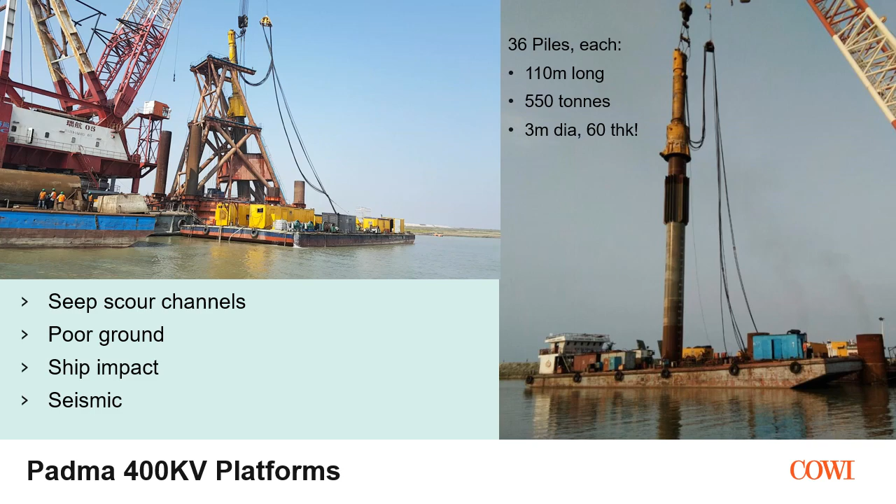Calling again on our geotechnical experts, in this case Professor Jørgen Steenfelt, who I've worked closely with over a number of years - he managed to develop a sequence of pile installation that enabled this partial plugging to mobilize the base resistance required. Again, that's an example of how we work extremely closely with the contractor to ensure the end objective is achieved. The piles themselves are quite massive - around 110 meters long, weighing about 550 tons each. They really are quite something.

My final project today is actually a pair of bridges in Brisbane that forms part of the Green Bridges project promoted by Brisbane City Council. This has been one of my most enjoyable projects in recent years, and I think it illustrates a number of the features I've discussed earlier on.

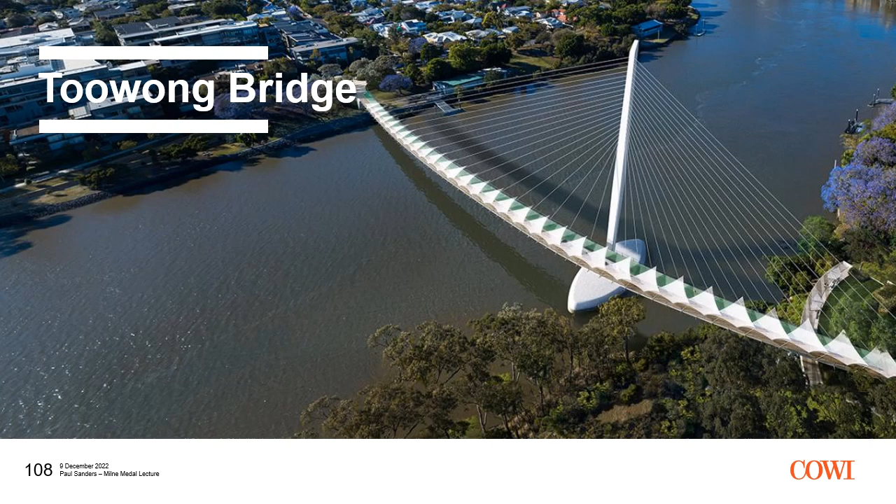The inspiration for this design came to some extent from the sail bridge which I described earlier on. This is very much a development of a similar structural principle, but it was developed to suit this particular site. On the left hand side you've got the Toowong area, on the right hand side the West End area.

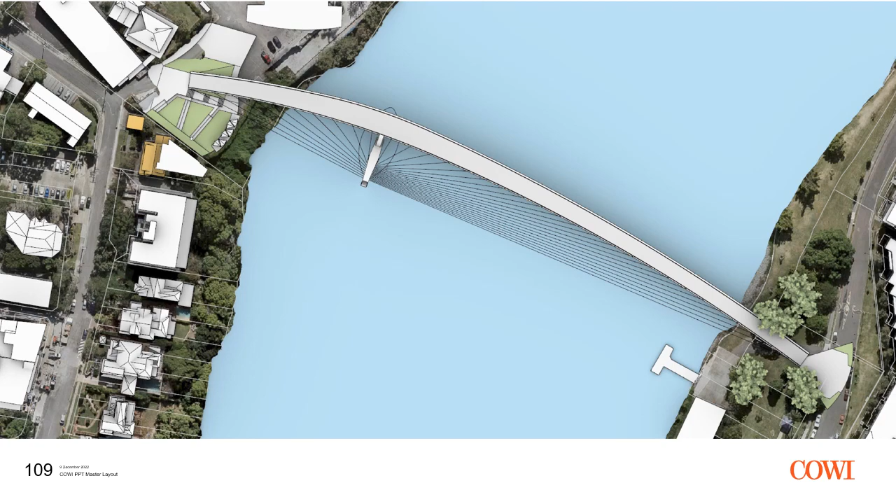One of the key constraints here was to minimise foundations in the river because of the bend you saw earlier on. We wanted to avoid obstacles that could impair the free movement of quite a significant volume of river traffic. So that was really a key driver behind going for a cable stay bridge solution.

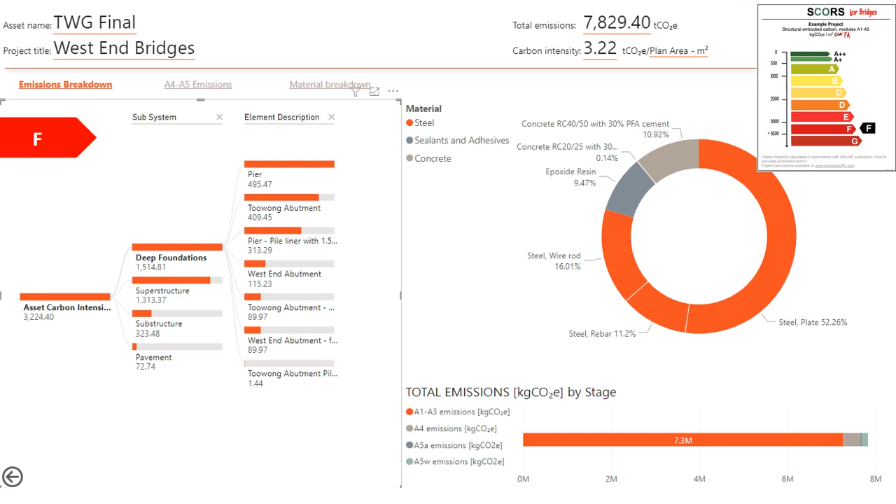In terms of embodied carbon, this bridge comes out with a rating around about F, but as I alluded to earlier on, it's important to remember that for this bridge type, that rating is reasonably good, because we're talking about longer span structures and more challenging foundation conditions. You can see the SCORS rating up in the top right hand side. Of course, the dominant material here is steel.

This is the St Lucia Bridge. This is altogether very different. Whereas for Toowong we were quite happy to have a tall mast that drew the eye, for the St Lucia setting we wanted an altogether much more low-key structure that was less visible.

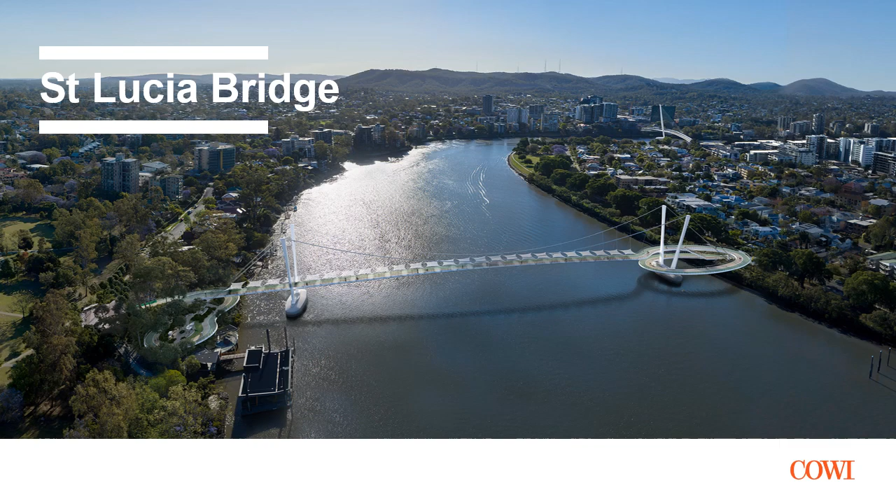However, at St Lucia, the single biggest constraint are the ramps and the tie-ins at each end. So in the middle of the river, we still need to achieve the same overall clearance, but getting down to the riverbanks at both ends was a real challenge.

Working very closely with WilkinsonEyre, Jim in particular, we came up with this solution where you've got this lovely curving ramp that snakes round. You do also have a stair access going down the middle, as you can see here. And of course, this is a suspension bridge solution, quite a different sort of structure.

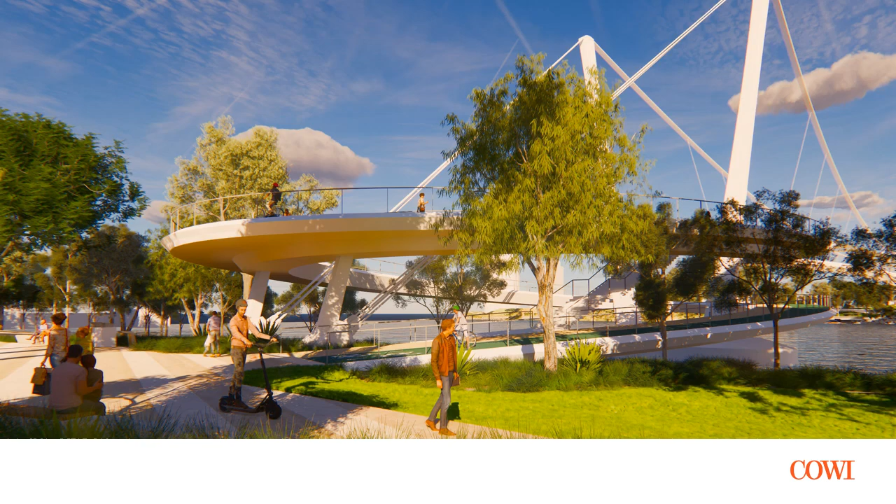And this is the ramp at the other end. In terms of embodied carbon, this again is very similar, we're scoring around about an F. I think quite reasonable given the form of structure and the physical constraints that we face at the bridge site.

So in terms of a wrap up, I hope I've presented a few good examples to illustrate the types of projects that we at COWI have been involved in together over a period of around the last 20 years. I've only been able to pick a very small selection of projects, but I hope you found those interesting.

I think the key conclusions from my side are that as engineers we're facing increasing numbers of challenges and many more demands placed on us. I think it's really impressive the way we as a profession are responding to those. Cost and program have always been key drivers, but more and more these days we're seeing other features pull on our time and our demands.

Quality of design, I think, as I've illustrated, is always key, and I think we as engineers have a responsibility to remember that these assets we're building are multi-generational. They are going to be there for decades to come, and it's really important that we put everything in to finessing those designs. I hope I've illustrated that a number of our designs have come about through that iterative process.